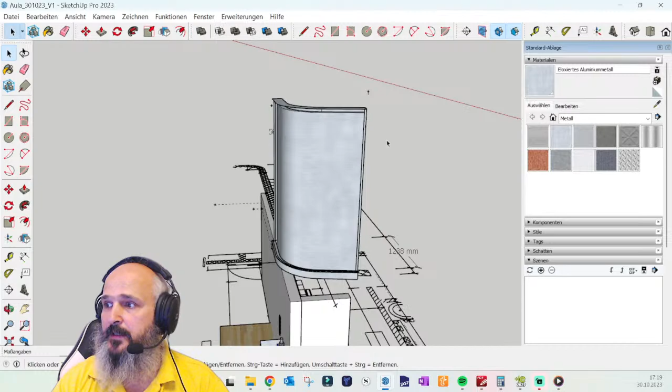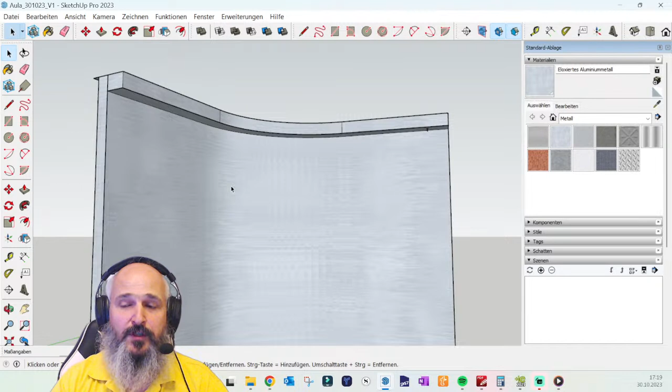And what I'm planning at the moment is a similar bended water wall here around the corner, and I will have the welded pipes here at the back. I'm using welded pipes because I don't want any leaks, so I will weld it and then I will seal it, because this area at the back will not be accessible anymore. And then the question would be how many.

So the first hole I would put here 10 centimeter distance to the side, because if I would put it here at the end of or at the beginning of the water wall, then I would create a stream which creates high pressure here at the edge, and then we would get dry areas here at the sides.

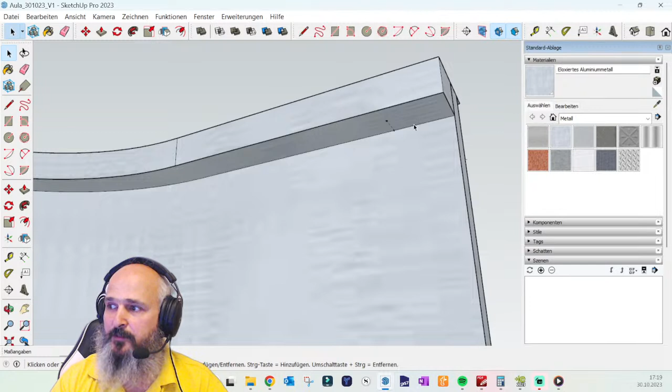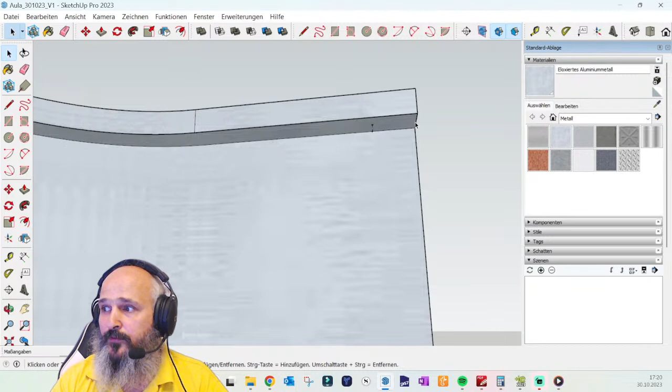This is why you want to have minimum 10 centimeter distance here at the side, so that once the water gets out, the pressure and the stream will be distributed in two directions, to the left and to the right, and then we get a higher pressure at the side, and this helps us covering the side with a little bit more water, because we want to have the side dry, and we don't want to have the V effect which creates dry areas at the side. So the first hole would be 10 centimeters from the corner at this side and also at this side.

In this example, we would then have left 1.60 meter between these two holes. So if we make it a straight line, it would be 1.60 meter, and this we want to divide by 5 so that we can get another 4 outlets between those two first outlets at the sides, which brings us to a total number of 6 outlets.

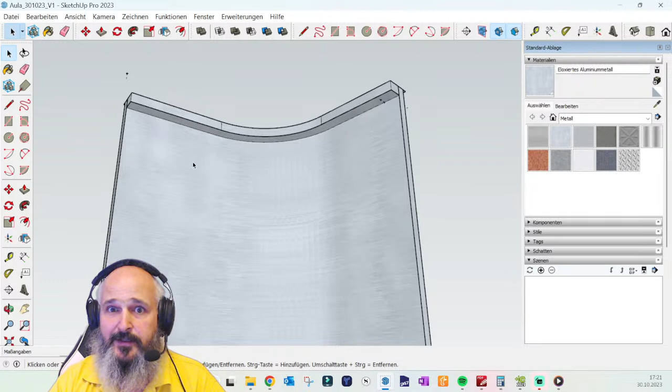And now comes a special trick which I recommend for you, is that you make these outlets at the sides separately adjustable, because what you want to do is you want to be able to adjust the amount of water here at the sides so that the sides get covered and you don't get too much water at the sides.

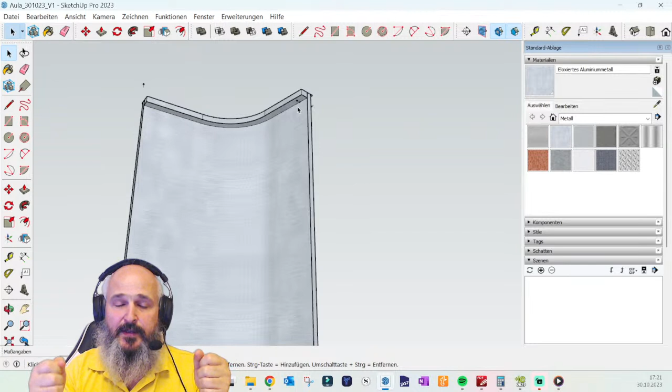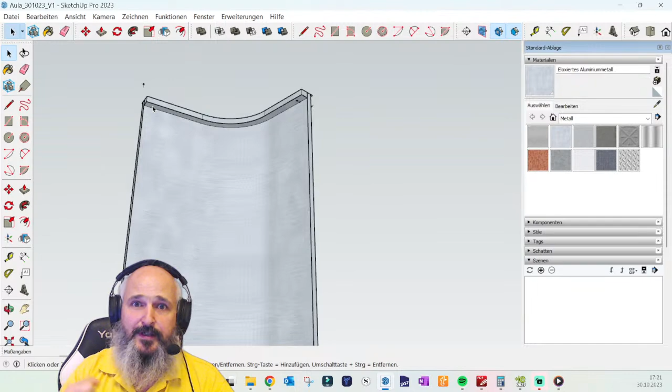These other 4 outlets between those two at the sides, you don't have to regulate separately. You can have these by 2 T's like a deer horn, regulated by just one valve, because here between those two, this is not a critical area, but the area at the sides, those are critical, and those you want to be able to regulate separately. So I hope this helps. Let's take a look at our beautiful example.